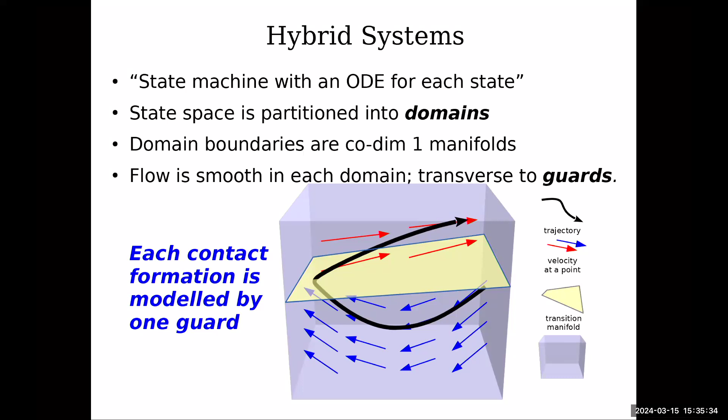And this is really important for robotics because contact generally changes the equations of motion. If my finger is on this table, there's a different constitutive equation for the dynamics of my hand than when my hand is up in the air. And so contacts in general are modeled by guards, typically one guard per contact.

But in general, we use hybrid models in robotics to deal with phenomena that physicists would call collisions. What's a collision? It's something fast and complicated that we don't want to think about, but that has a predictable outcome. If you've taken a physics class and talk about an elastic collision, you know from conservation of energy and conservation of momentum what the output will be. You don't need to work out exactly how the two things that hit each other are going to warp and wobble and eventually move apart, because you have a way of predicting the output of the collision from the input, and we can avoid a lot of complications that way.

We can avoid dealing with the fact that rigid bodies are an abstraction of something that doesn't really exist in the real world, that material interactions are limited by acoustic propagation rates, there are plastic deformations, there are surface interactions—lots and lots of different things that can happen when one thing touches another that we can ignore by treating it as a collision in a hybrid system.

I started looking at these sorts of hybrid systems related to locomotion with classical models like people use for, say, bipeds, where you have a leg hitting the ground and a change in equations of motion. But then I had the misfortune of being an actual experimental biologist, so I had to deal with this.

So if you look at these animals moving around, you'll see something unfortunate—look at the three legs. Bam.

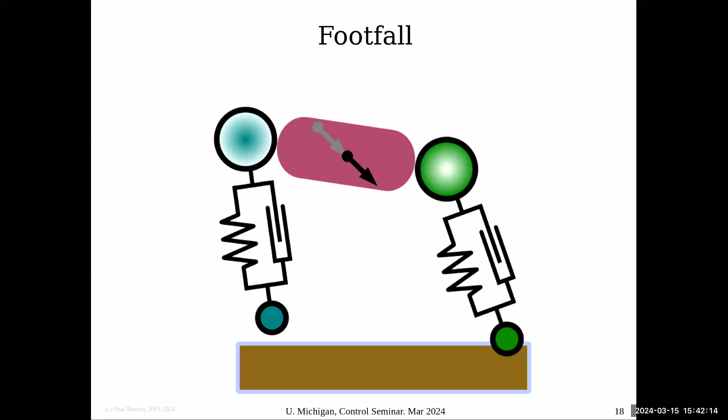There are two limits here: the limit of relaxation of the body to its rigid shape, which is a fast process, and the time difference between the events, which is also a fast process. Depending on your view of which process is faster, you get a different solution for the physics. Illustrated otherwise, imagine this robot with two spring damper legs approaching the ground. A leg hits the ground - it can't actually penetrate the ground, so it will relax.

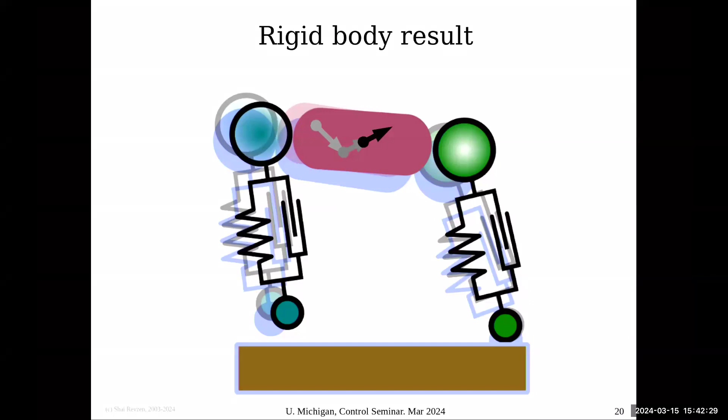In the rigid body result, that information gets propagated through the entire body. So the effects are really felt by the whole body before the second touchdown.

It turns out this sort of model mechanical engineers have been using for a long time, and there are a whole bunch of papers, including by folks formerly here like David Remy, which show that really bad things can happen in these rigid body collision models. You can have discontinuous dependence, and inconsistent results when modeling kinematic trees. The rigid body assumption and collisions don't make good bedfellows.

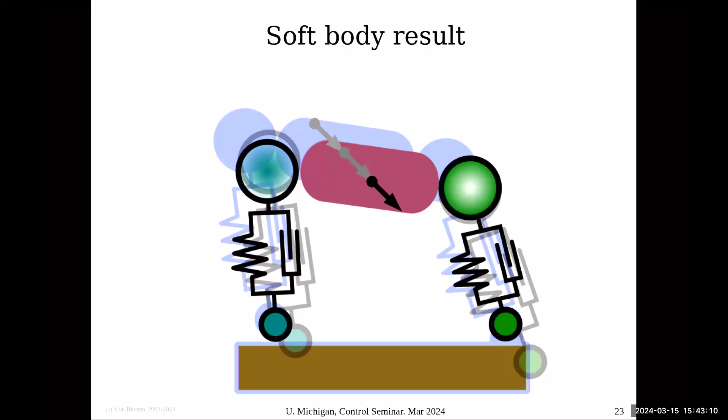A different way of thinking about it is a soft body result, which says both legs compress, and the leg effects are independent. In this case, the influence on the center of mass will actually be additive, so that's even easier than the general event-selected case. And the kind of system you're going to get is an event-selected system.

So as I mentioned, the mathematical properties of these indeterminate transition sequence problems were not really studied beyond two possible contacts or transitions. So I'll go a little bit into the mathematical properties of event-selected systems.

But to prepare for that, I want to tell you about an important class of functions that we usually aren't familiar with and don't teach about. These are called PCR functions.

PCR functions are continuous functions made out of pieces. Each piece of the PCR function is a CR smooth function. So for example, you can take two CR smooth functions, f and g, and if I take the pointwise maximum of these two functions, this new function is PCR. Each piece comes from a CR function. Because I'm doing a pointwise maximum, the transition is always continuous.

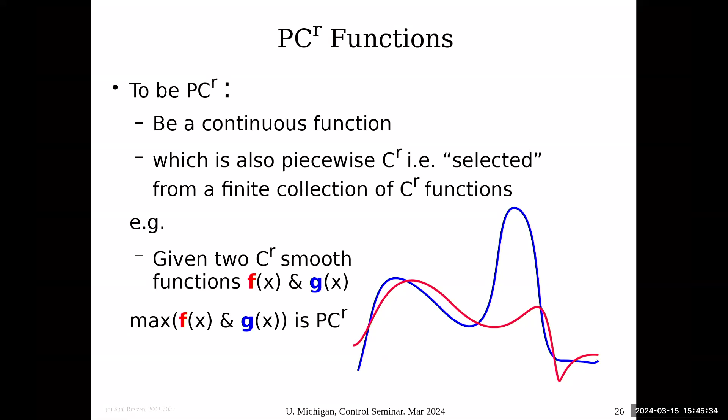So event-selected systems are basically systems where we have some region with some point that is on the intersection of multiple guards, that point rho here. We have smooth dynamics in each of the regions. And we have one additional condition, which is that with respect to the functions defining the guards—locally I can define the guards as level sets of some function, proper level sets—the Lie derivative is strictly positive, bounded from below for all of them.

What does that mean in practice? All the events will happen, and they will happen with an upper bound on the time. That is, I know they will happen with certainty after waiting long enough. So it's the case of catching the basketball. I know all my fingers will eventually be on the basketball. The question is just in which order.

So one of the quick things we can do with a system like that to simplify it is rewrite our system with respect to the touchdown times on the different manifolds. So instead of using the original coordinates, we can hallucinate rewriting the system where our coordinates are just how long we are before or after each event. It turns out that if we have enough guards, that gives us a full coordinate frame, but now our guards have become the coordinate hyperplanes. So our life is a lot easier already.

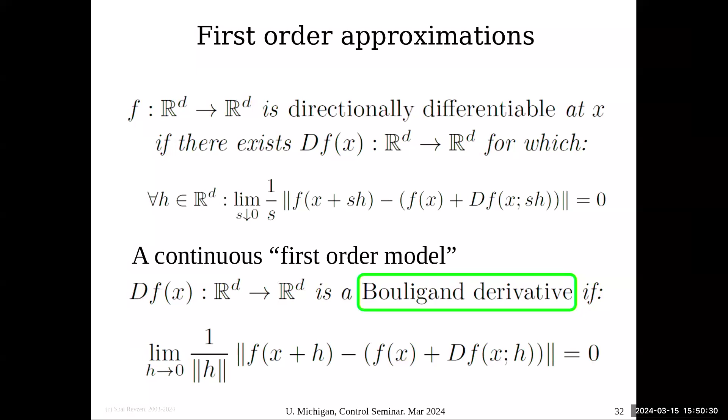And the theory of PCR functions tells us, and that goes back to the question from the audience earlier, PCR functions end up Bouligand differentiable everywhere. That is, they have this sort of first order approximation at all points, even though they don't have a classical derivative. And this is really powerful because that first order approximation turns out to have an implicit function theorem associated with it, and a few other nice sort of results from analysis that normally we wouldn't get for functions that aren't smooth.

So now that I've introduced that, I can say what our key results are. It turns out that event-selected systems have a unique PCR flow, which is Bouligand differentiable. This is almost as good as having a smooth flow in the sense that we have first order approximation around all trajectories.

Which is sort of different than a normal derivative where if I'm one in one direction, I have to be going -1 in the opposite direction.

A unique flow exists. It's written here in integral form because we don't have a conventional derivative. I can't write a conventional ODE here. The impact times are defined and they're PCR as well, so that if I take a point and I ask how long will it take until it hits a guard, that function itself is PCR. And it turns out that a unique maximal flow exists. So really there is a solution to this ODE, which is something that's not immediately obvious for non-smooth systems.

There are non-smooth systems that don't have a unique solution. So that itself is actually quite valuable.

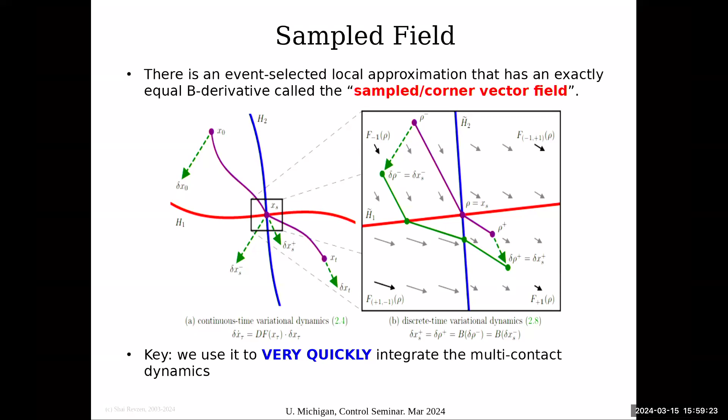What's an example of doing this? We did an example problem: a multi-legged chair bouncing on the ground. It hits spring dampers. Why do we want spring dampers? Because the velocity generates a force immediately, so you don't have a force that builds up from zero. We already know elastic collisions make smooth systems, so nothing interesting happens there. We need the force to start from something non-zero immediately after contact.

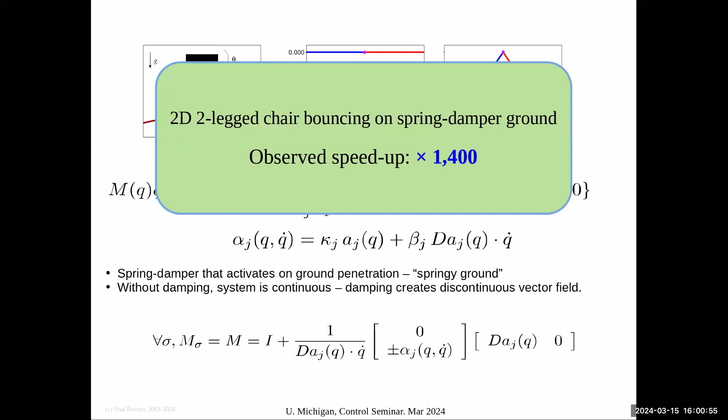So we write this system and its equations, and simulate it with a conventional simulator that detects events and does ODE integration in each domain. We compare that to a simulation using this event-selected approximation running through the projection sequence. For a two-legged chair bouncing on a spring damper ground, we ended up about 1,400 times faster. For a three-legged chair in 3D, it ended up about 43,000 times faster.

So this is a big qualitative difference in terms of the performance of our simulations. This is taking a system that was hard to simulate and bringing it back to the speed of simulating a smooth system, pretty much. And so this was very encouraging.

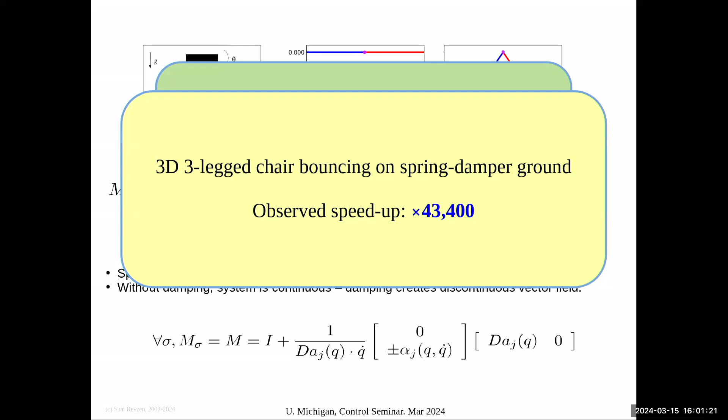This was work done by George, and then Marian followed up by writing a general purpose event-selected system integrator. We have it working, and if you want to beta test it for us, please talk to us.

Just to give you a sense of what this looks like: we have our guards. We add a little bit of secret sauce here. We ask that our guard functions also have the following property with respect to the vector field: when the guard is less than epsilon, the second derivative of the vector field has to be sufficiently small. So the vector fields have to be kind of constant when we're sufficiently close to the guards. You can adjust the scaling of your guard function to represent that.

So basically it's another bit of information we ask the designer of the simulation to put in. But with that information, we can do the following: I'm close to a guard, I project to that guard, I simulate, I'm close to another guard, I project to that guard, and then I continue. And that's very, very fast.

The proof we have in our current paper, which is on the arXiv already, only shows that this is going to be a first order integrator, but we expected it to be a second order integrator based on the general theory, and indeed the numerical tests seem to support that.

When we compare to the commonly used mechanical simulator MuJoCo, our trajectories and their trajectories look very much the same, except we wrote this in Python and it runs just as fast. Theirs is an optimized C++ simulator specifically for mechanics, whereas this is a more general class of systems. So hopefully this tells you something interesting is happening with event-selected systems.

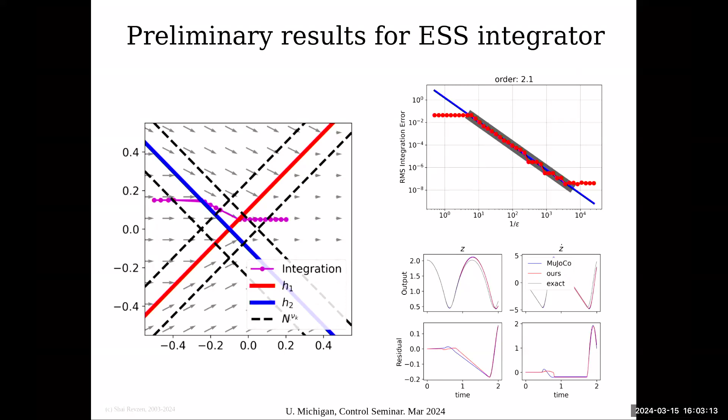But another interesting thing happened when we started analyzing these systems that really surprised us. Let's go back to mechanics. Imagine a second order system, which is typically what we have in mechanics: q double dot equals f of q and q dot. But now let's say our events only depend on position, and furthermore that they generate forces that are additive. This is the case everyone else is doing with complementarity systems, but we're just formulating it differently.

We define our saltation matrices after transition sequence sigma and crossing guard K. We'll call them P sigma K. Now the behavior for our entire system will just be the product. To be more precise, our saltation matrices are identity plus that P. We write this product out, and each transition sequence sigma has this product.

But we can expand this product, right? We can just expand it. The first element in the expansion will be I. The next element will be the sum of these guys. And then the next element will be higher order terms of products.

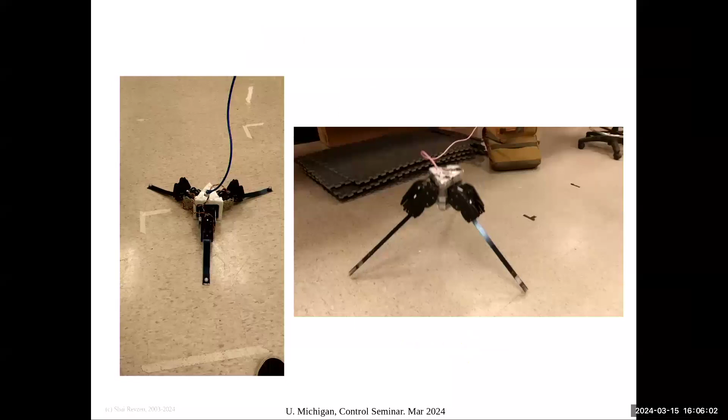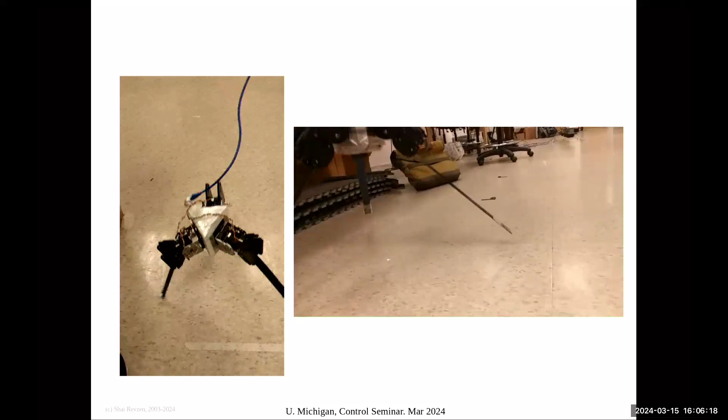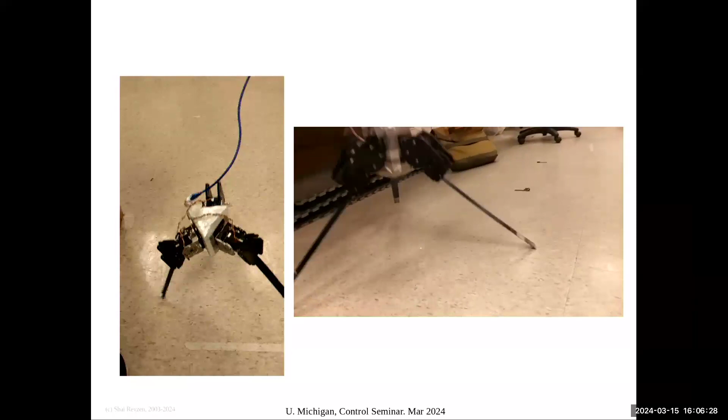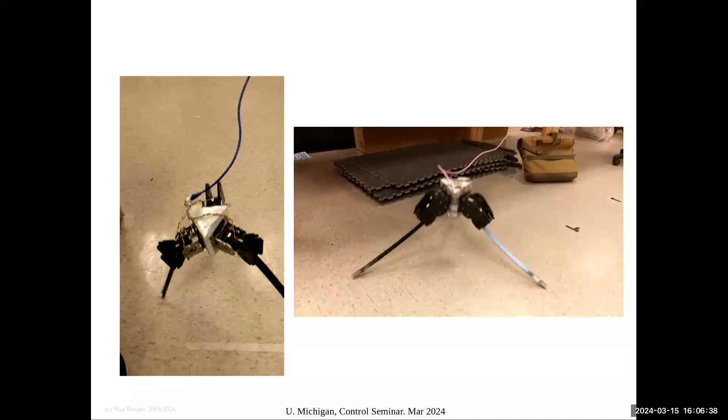So we tried to build a robot that would have 3 independent hybrid transitions by making these 3-legged hoppers, so they kind of land at almost the same time. But we quickly discovered something annoying: we need dynamics from before collision to after collision that actually depend on the state before collision. But all our robots didn't seem to do that. If we take these robots and drop them on the floor, they don't bounce back up.

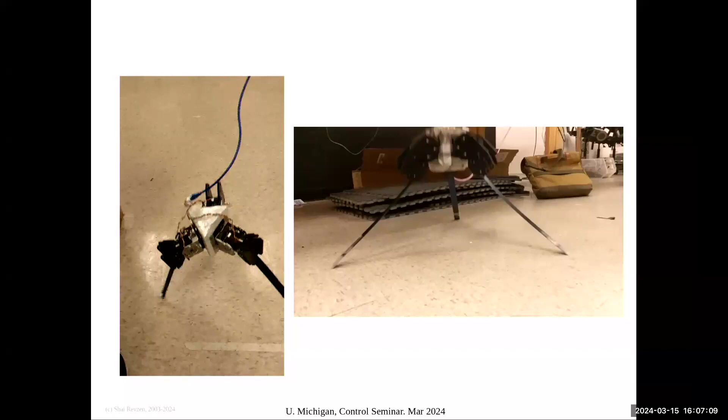What really happens, even though this looks like nice hopping, is that all the energy is lost in the collision and the PD control of the motors. And with the energy, we also lose the history of the state—dissipation is the same as forgetfulness. So instead of having a robot that's an example of our system, we discovered it's really hard to make a hopping robot that's an example of our system.

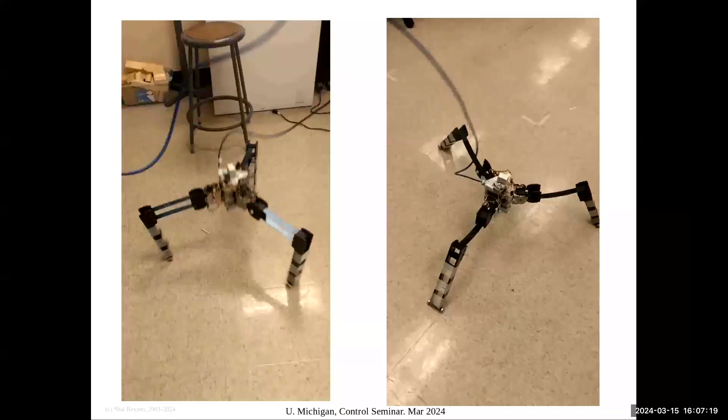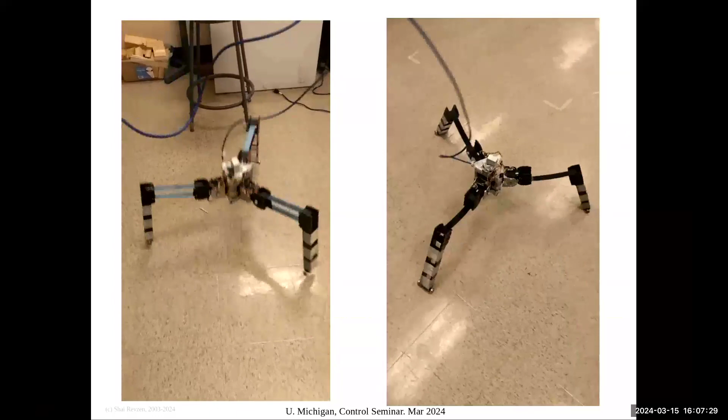So we built all these different approaches to try and make hopping robots. Initially we thought maybe this is friction with the ground, so these guys have toes that slide on the ground, these guys have little wheels. That didn't help. Then this one was a little better with the wheels—it has stiffer springs. Then we figured okay, maybe this is not it, maybe we need better springs.

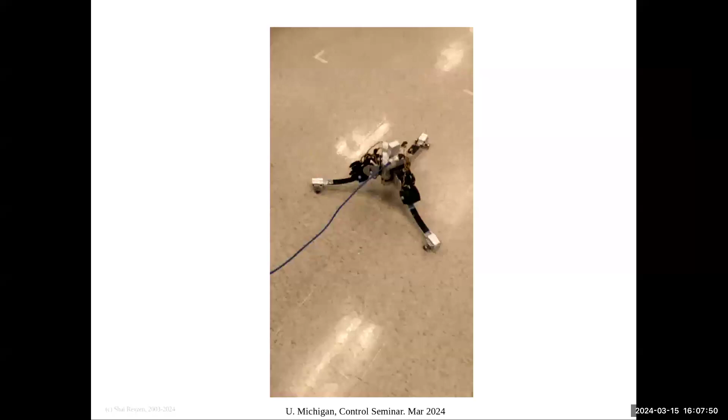So we built parallel pairs of springs with different kinds of spacers between them. This is high-speed video of different kinds of legs hitting the ground. The leg on the left has spacers between the springs so they can't buckle into each other. The leg on the right, you see they do buckle towards each other—all in this attempt to make something that stores energy in elastic storage and returns it, that has some continuity of state through the collision with the ground.

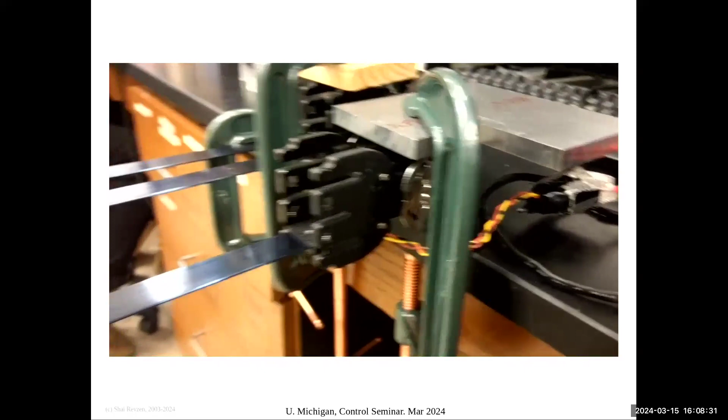And after many desperate attempts, we did this experiment which finally helped us understand what's going on. So leg 1, leg 2 attached to the base, leg 3 attached to the motor. So what does this tell us? That PD control is doing its job and destroying all the energy. That's what it's telling us.

It turns out that series elastic actuation is really bad for what we're trying to do, because the motors have good PD controllers—the D term is taking all the mechanical energy out, and we can't tell it not to do it.

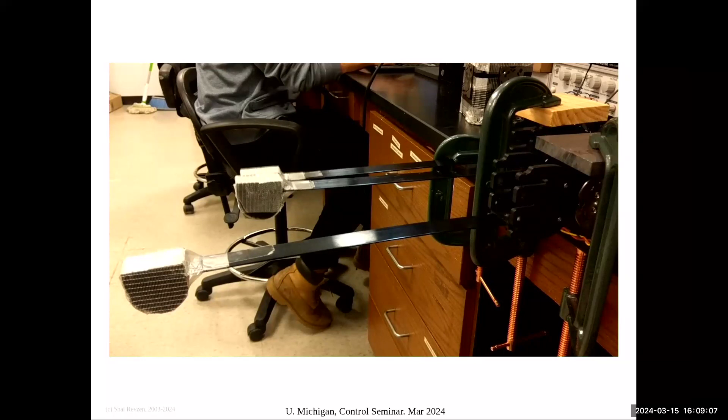So we came up with this guy—parallel elastic actuation. The legs are hitting the ground, and the robot is bouncing back up purely mechanically. Now that it's in the air, we realize the cables are slack, and we pull them taut and preload the springs with some energy. So this robot design, unlike all the previous ones, restores about 44% of its energy hop to hop. So it is an actual example of the system we want to study, where there are multiple collisions and the state before the collisions is actually carried through by the dynamics to what's happening after.

And so that means collecting a lot of hopper data. This is an example of hopper data—we have some markers on the toes, some markers on the body. We can see the body Z bouncing up and down, and these are the distances between the body and each of the toes. So you can see that the system is basically working.

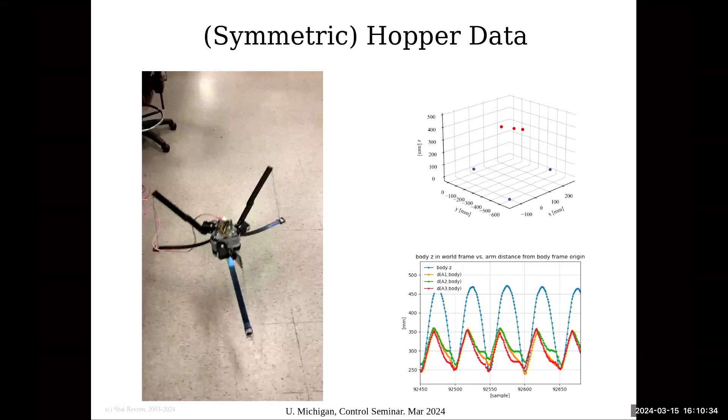And now we wanted to analyze these data. So here's what we want to show: that each of the legs is doing something different. Otherwise this isn't an interesting event-selected system—if all the legs are identical, it's harder to imagine why you wouldn't just have a C1 output. It turns out it's actually not guaranteed—even if the legs are identical, you're not guaranteed to have a C1 output. But it's a lot harder sell than if I show you that each leg is just doing something different. So how do we show that?

I created an example to show you why this is tricky. Here we have two different linear models, the blue line and the red line, and we're measuring them in a noisy way.

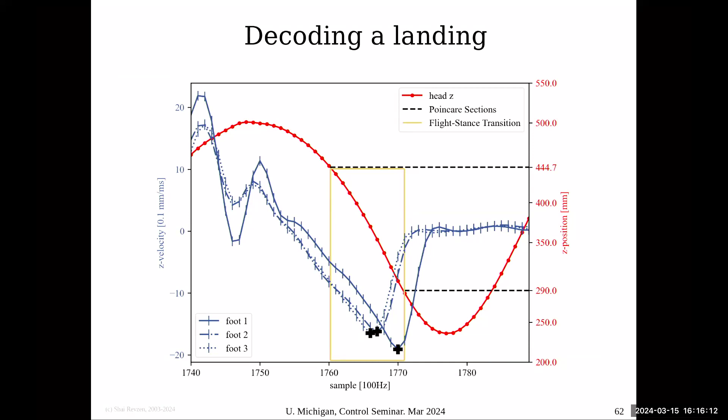And so we can build these maps, and we've tried to build these maps. For each leg, we build a model of the map it predicts for the state of the entire robot. So if I'm landing on leg 1, what is the affine map governing the behavior of the robot? Then I compare what happens if I use the map for leg 3 to predict what happens with leg 2 hitting the ground, and so forth, and we get differences. I'm not entirely happy with this.

So we're getting to the part where we have some incompleteness, but that's the basic approach to show that each leg is different. Then to show that our total least squares regression of the affine model is actually significant - how would we show that it's significant?

One way to show whether maps are the same or different is to think of them as hyperplanes in the space of maps, and look at the distances between these hyperplanes using something called the geodesic distance. We do that sort of analysis. I don't want to get too deeply into it, except to present that there are gnarly statistical methodological problems in showing this experimentally, but we're slowly making our way through that, and I think we'll have a result.